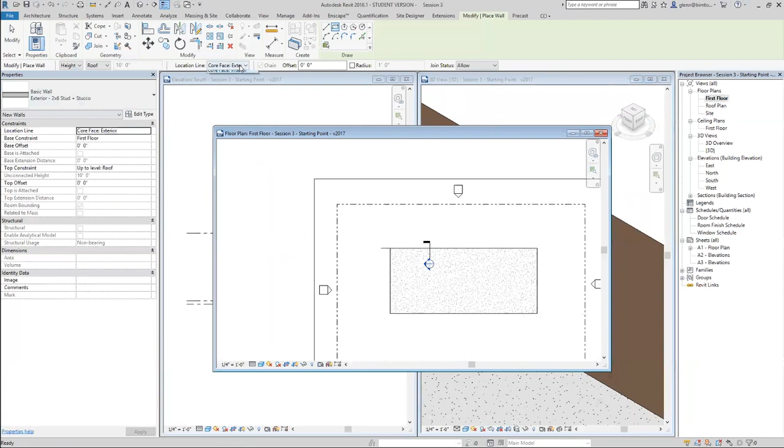Now I'm going to draw some nice walls. I will just let them go up to the roof level. That's fine. I'll let them be the stucco wall. That's fine. I can use this tool. This tool is a little rectangle tool. But I'm going to say let the location line be the core face. Okay. And then I'm going to choose that corner down to that corner.

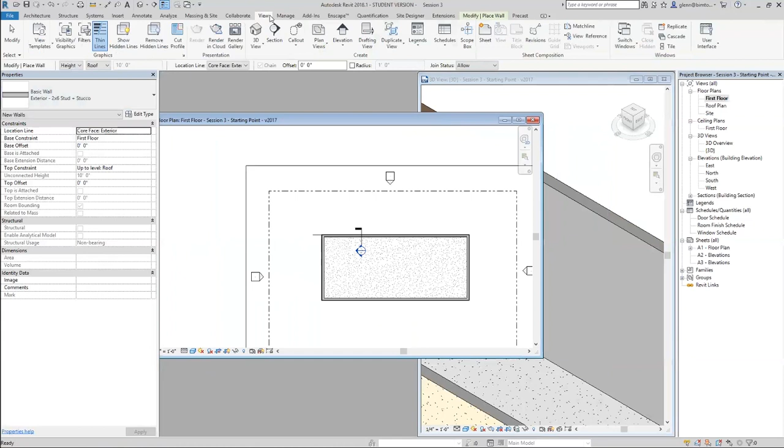Okay. And we should be in good shape. Close that up. I'll tile these. View. Tiling windows is WT. And over here, I'll zoom that in so you can see it. If you want to zoom that, ZF is zoom to fit, or ZR is zoom to a region. Okay, so I got my nice little walls here. They're looking pretty good there.

Now, most of the walls we work with are just a single material, but you can create a type of wall called a stacked wall. Stacked walls are really useful if you have two different materials or different types of layerings of materials and you break them at a set height. For example, in a lot of houses we do around here, we'll say the first 3 feet is going to be brick or stone or something like that, and above that it's going to be wood. We'll put some combination of materials in there.

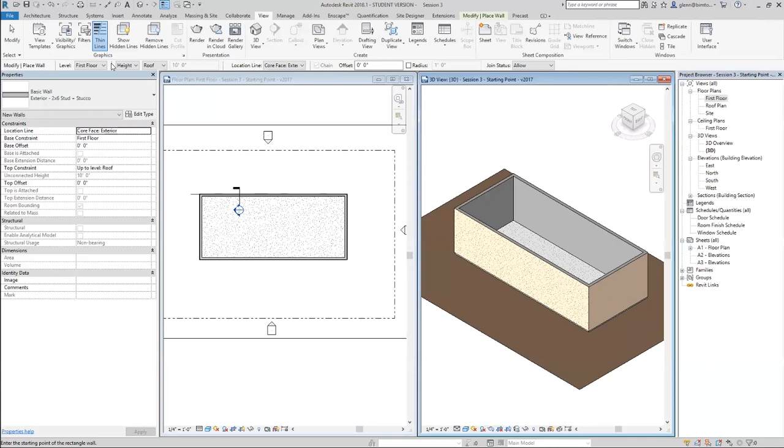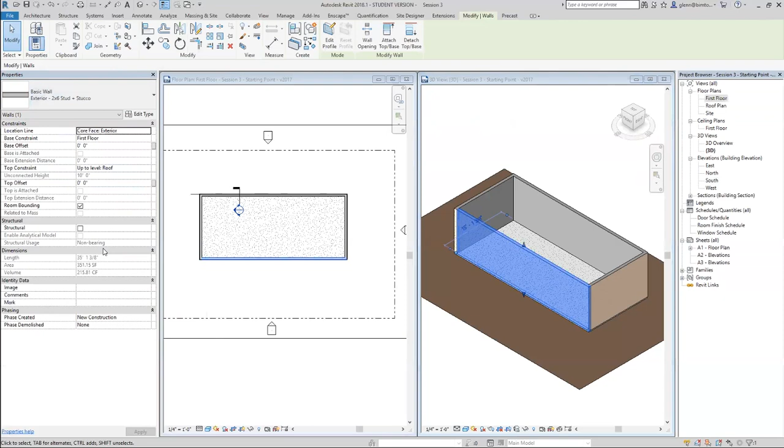And again, we don't use them all the time, but if you ever want to create a stacked wall, what you do is you choose the wall, and pull down on the types all the way to stacked walls. Now, there's only one type defined in my file right now. It's shingle over brick with wood stud. So let's show you what that looks like. It's kind of a combination of the two.

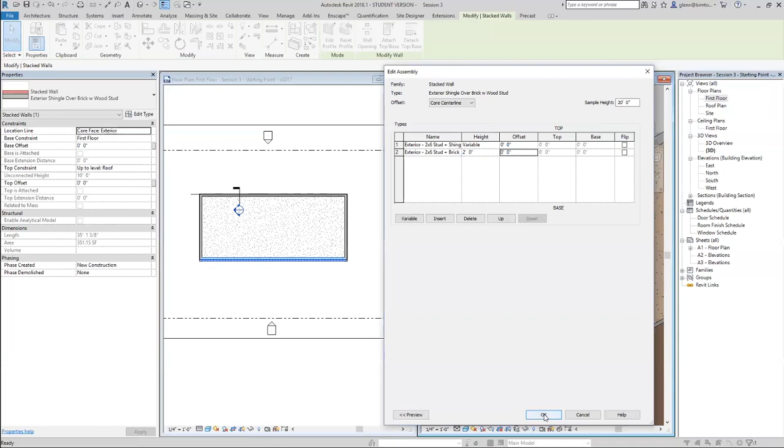But you can define different types of stacked walls. They have properties too. If you choose the stacked wall and you say edit its type, you see it has a structure. And the way this works is it's going to put the brick up to 7 feet, then it's going to use shingles above that to any level that it wants to. If we only wanted to brick up the first 3 feet or only up 2 feet or something like that, what we can do is put 2 feet in there. Okay, that's a little bit more modest.

Now, let's say, for example, you actually wanted to have brick, but you didn't want shingle above it. You wanted stucco above it or something like that. So this is going to be the first of many times we're going to do something here. We're going to choose something that has a type very similar to what we want, and we're going to duplicate it and make a change. Okay, so let's show you what I mean. This is so similar to what I want, but just not quite there.

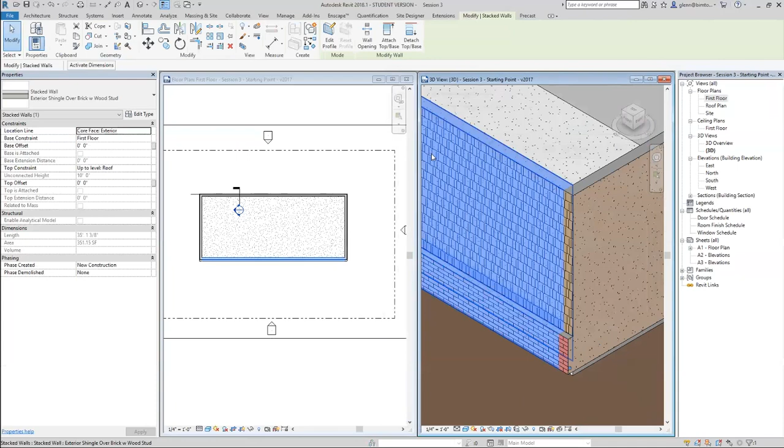So what I'm going to do is edit it. But in terms of editing it, I have a choice. I can either change this one, or I can make a new one that's very similar and has a slightly different name. The reason for doing that is if you want to keep the old ones around in the library, there might be cases where you still want that old type and you don't want to change them. Duplicating lets you create a kind of a one-off that lets you make the change without having to change everything in the past. So let me go ahead and say duplicate.

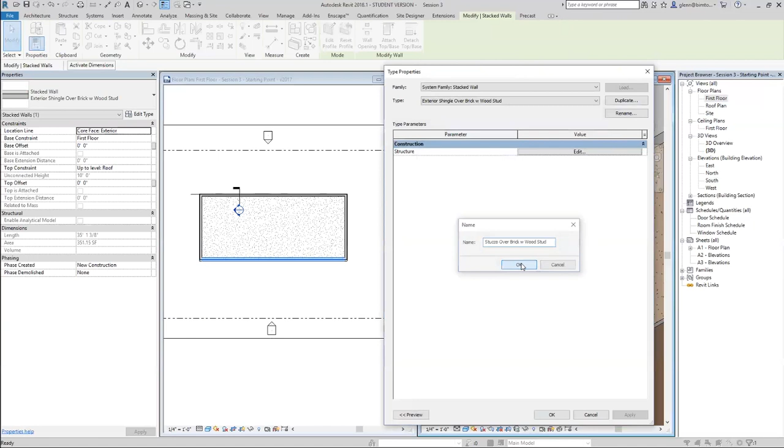As opposed to shingle, I'm going to call it just stucco over the studs. So far, it's just a name, not much difference yet. But if we edit the structure, I can say, let's change the material here to be the stucco wall type. Okay, and we can close it up. And now we've defined a new type.

Okay, so that whole behavior of choosing a type, duplicating it, and changing some parameters is very common. We'll do that to doors and windows in just a second too, whenever we have things that are close but not quite right for what we want.

Okay, so again, stacked walls are, not everyone uses them all the time, but they're useful to know about. Let's talk about this last little chunk of walls here in terms of basic walls. And this is the whole idea of adapting walls or adjusting wall boundaries. Generally, when we put the walls in, they're going to go up all the way to level 2 or level 1, whatever you have them going to.

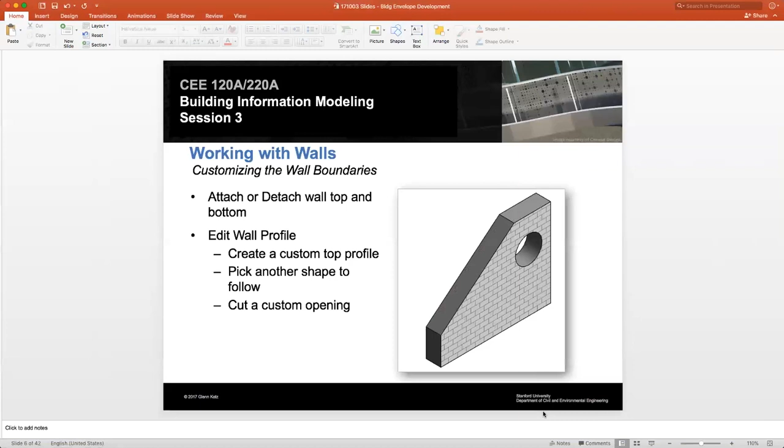Okay. And we learned last time a little trick about detaching walls to go through, or attaching walls to make a specific behavior. So again, let me just kind of demonstrate that real quick. To do that, I'm going to go to my roof plan. I'm going to draw a little roof in here. So I'll say architecture. Let's draw a nice little roof. I'll pick some walls.

Now, right now, let me flip that over. This would actually go up. I have to trim that a little bit too. You see, it got a little bit messy there in terms of trimming to join those together. Okay, right now it would pivot up from all sides. It would slope up from all sides, being a little hip roof, if you like that terminology.

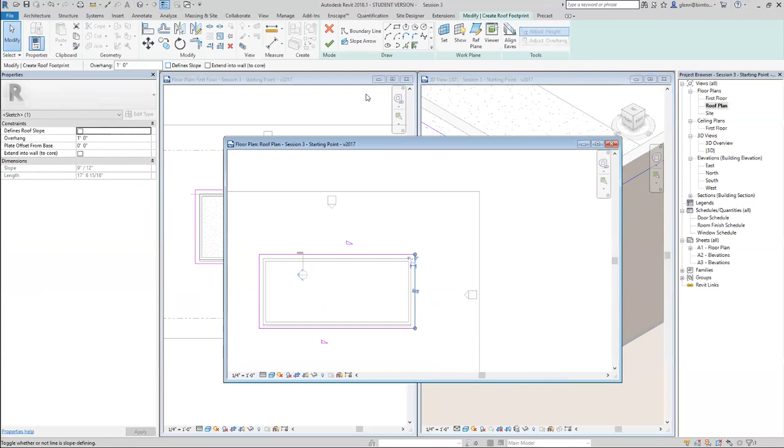What I'm going to do is change that a little bit, though. I'm going to say on this side over here, turn off the slope, and on the right side also, I'll go up to the options bar and click on this define slope, turning that off. Okay, I'll take a look at what that looks like. Okay, so I got a little roof in there. I think a lot of you have something that looks similar like this.

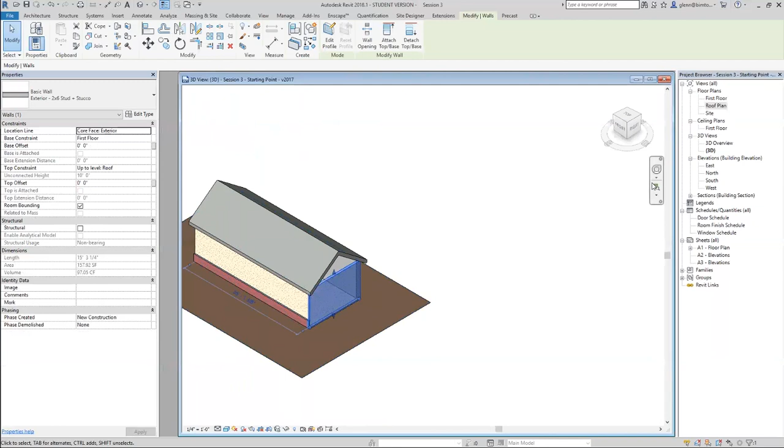Show you that what we can do is we can choose this, for example. We know that this wall is kind of hanging around here, but it's looking a little bit too low right now. And we learned that we could take that and say attach, and then click the roof, and it would attach it up there. So that's probably the most common way of reshaping things. It's just attaching them up and making sure that there's a parametric relationship.

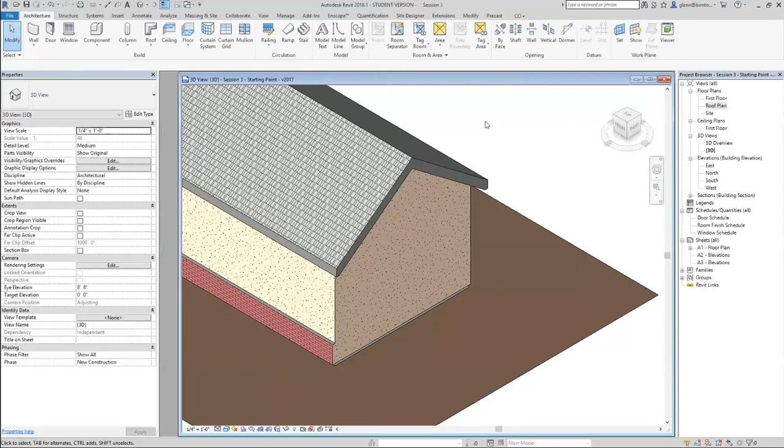But let me show you kind of another way to do that, and that is we can customize those. To help you see this, I'm just going to draw another wall just out here, outside the building, just so you can sort of see it very clearly. There's my wall hanging out. And if I choose the wall, you notice I have attach top and base. That's actually a really good choice.

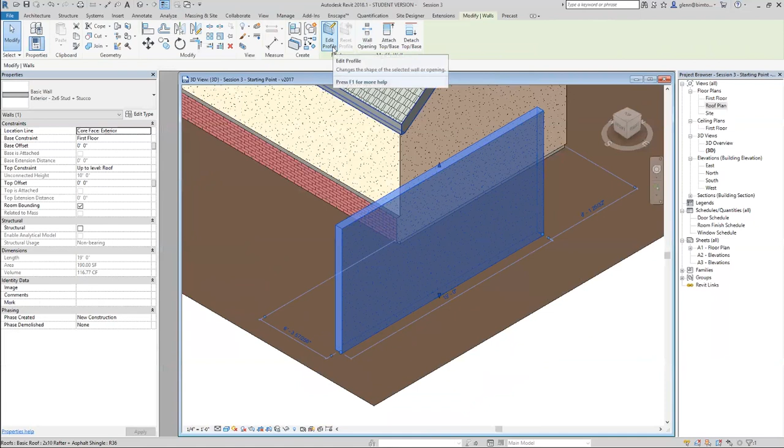But over here, there's another choice called edit profile. And editing the profile, it does this. It shows you the pink boundary of the wall, and then you can change it if you want so that it can be a little bit custom. And again, this is going to be a common operation. You're going to find out that this notion of showing you the boundary and then letting you alter the boundary is the same way we put holes in floors. It's the same way we can put openings in roofs. We can do a lot of things like this.

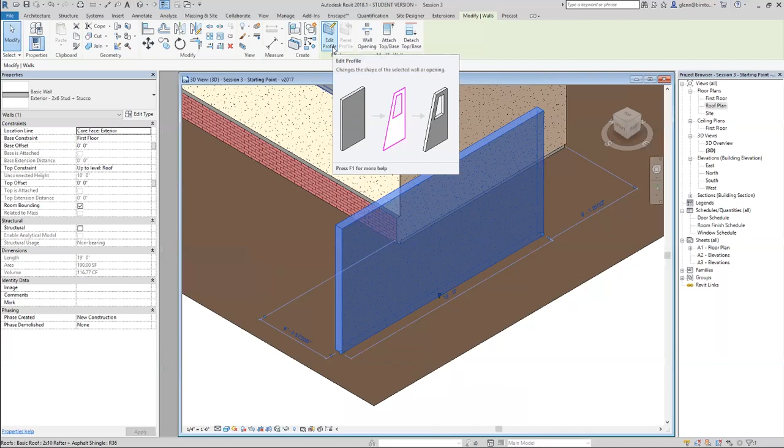So what I'll say is just edit the profile. There's the little pink boundary. And if I want that to, for example, be some artistic wall that slopes on down, I can do that. Now, because we're using the pink boundary rules, we have to have continuous loops. It always has to be a loop that doesn't have any overlaps, doesn't have any gaps in it. So I'll use the trim tool, and I'll trim it here, and I'll trim it there. Okay, and that'll make a wall.

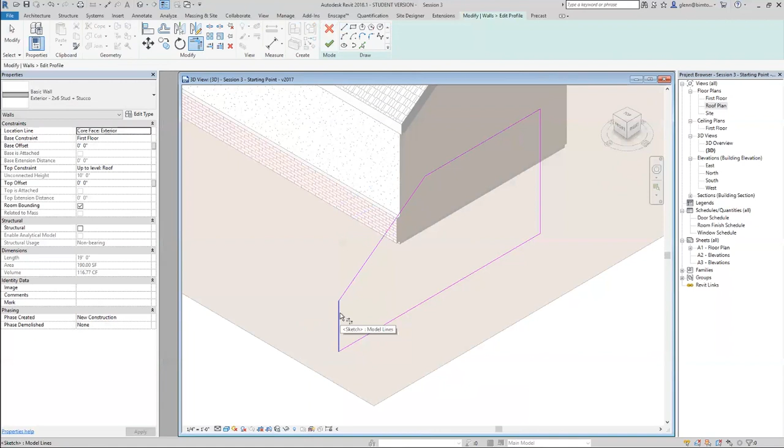Now, just to show you a variation on the scheme, I can put another boundary over here. That'll cut a hole in things. So you have complete control. Your walls can be as custom as you want. Now, when you do this, this is actually pretty custom, so don't do this everywhere. You're better off, if you can, just joining to the roof and letting that take care of it. Because the nice thing is, with the roof join, I'll show you the big difference between these things.

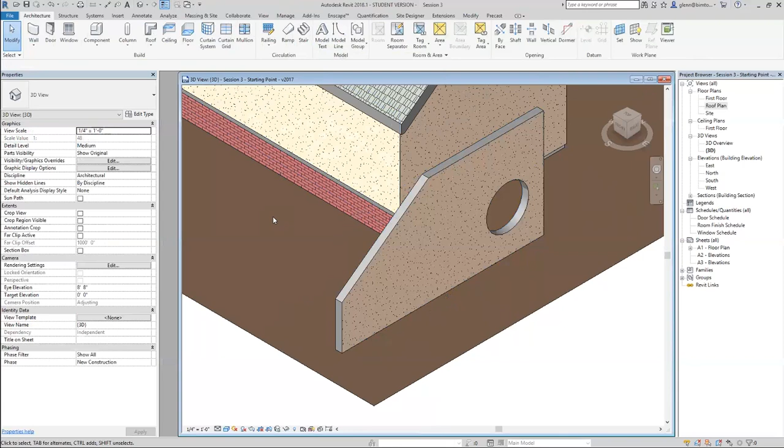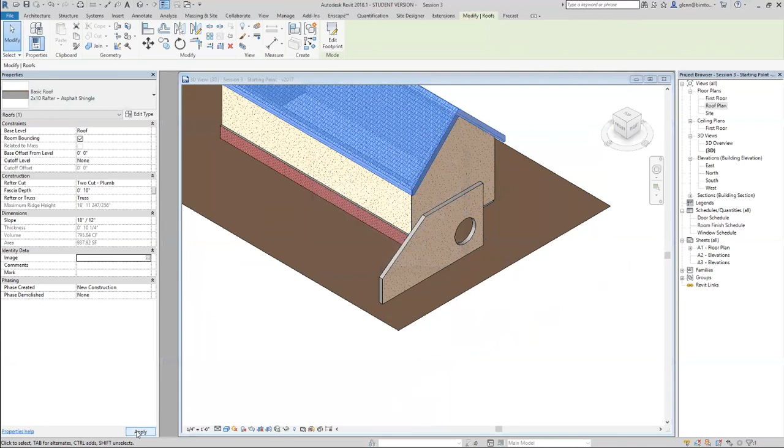With the roof joining technique, because you created it as a nice parametric relationship, if you decide later that this thing is going to be, oh, much steeper, or even steeper still, that's a little too steep. Okay, the roof is staying aligned, whereas this guy over here won't. That's locked in.